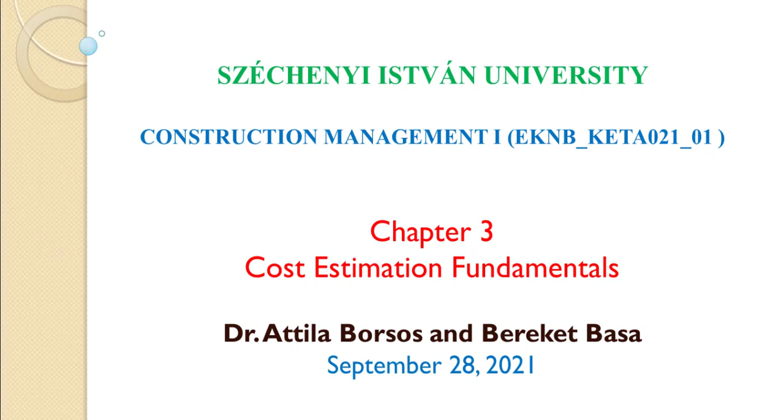Today we are going to see specifically the project cost estimation fundamentals. Last time Professor Attila told you about some estimation fundamentals, and we saw the detailed estimation, especially related with how to calculate unit rate analysis. So there is a lot of information here. Maybe we can divide the class into two because we can't cover all of it. I will try to cover as much as possible, so the rest is homework.

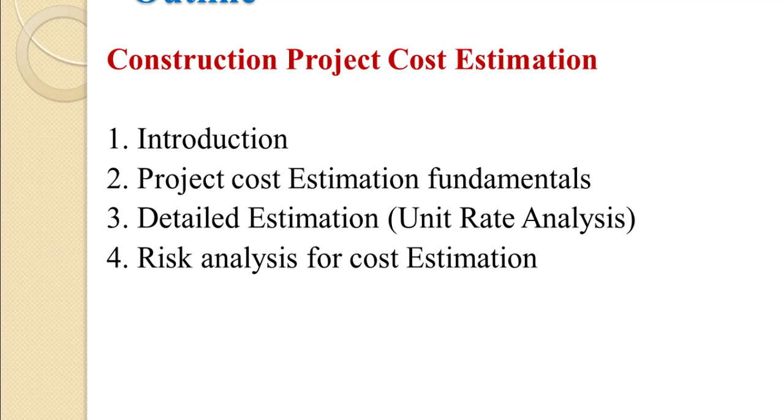As you see here, the first fundamental concept of project cost estimation is that we have three terms: project, cost, and estimation. The project is time bounded, it has its own unique characteristics, a starting time and finishing time. We can say project like road construction, building construction, tunnel construction.

So to start this construction, we need cost, in other words we need money. So we have to estimate, we have to determine the initial or the starting cost, or the total cost of this project. Simply, project cost estimation is the process of valuing the monetary expression. It includes all of the probable costs, for instance during the planning time, during the monitoring time, and during the controlling time for the proposed project. So we are going to estimate or determine the proposed cost for the project.

Under project cost we have different cost types. The first one is the project appraisal cost, because we have to know about the preliminary investigation. During the investigation time there is its own cost, so the first thing is the project appraisal cost, that is the initial cost.

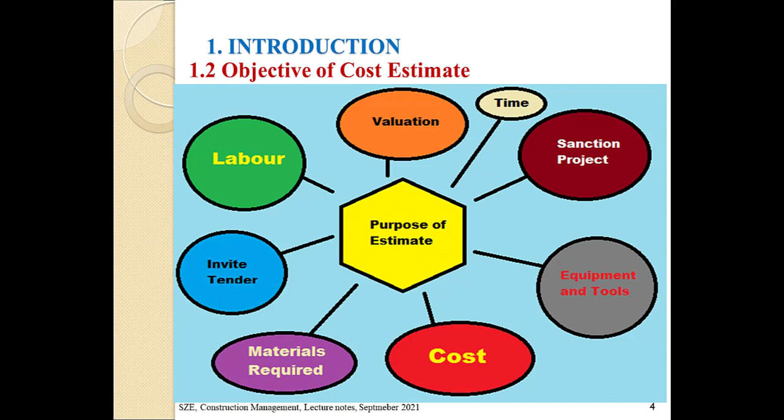Sometimes there is escalation in the work. For example, one of the projects I was involved in had escalation every 6 months, so because of that the price is increasing. So it helps us determine the escalation in the future. These are some of the objectives of cost estimation.

So what is the information required for cost estimation? If you want to be a good cost estimator, the following information is required from you. You have to know about this. The first thing is the correct information of the market price. So you have to know the correct information of what is the price of cement, what is the price of coarse aggregate. If you don't know the correct market price, the total cost estimation will be wrong.

Again, the correct information of the rates of various categories of skilled and unskilled laborers. Also, you have to know the correct information of the equipment. So here when we are talking about skilled and unskilled labor, we have, for example, skilled labor like engineers or professionals. In unskilled laborers, we have daily laborers. So we have to know the correct information, the work rates. We also have to know about the productivity, how much is the output of those workers.

Again, we have to know about the equipment and the tools. For example, if we are going to rent equipment or a tool, we have to know the correct information of these inputs, okay? So these are the most important things.

The final thing is up-to-date knowledge of the construction method. For example, traditionally, if you are going to make concrete, we used the traditional way to mix concrete, but now we are using the mixer or a truck mixer. So you have to have up-to-date knowledge of construction methods. Based on this, we can estimate a project cost perfectly, okay?

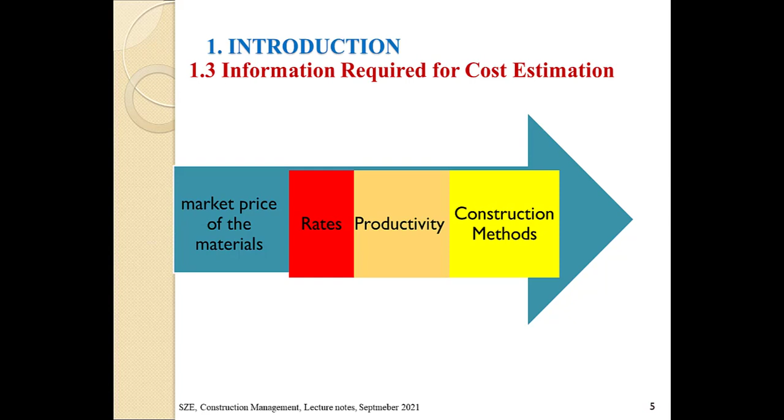So the following are skills and knowledge which are needed for the cost estimator. If you want to be a cost estimator, you have to have this knowledge. The first thing is, as an engineer, you have to be able to read and understand contract documents. Actually, the contract document has two parts, the general part and the specific part. If you don't know about the contract document, you can't estimate. In the contract document we have, for example, drawings. You have to know about drawings also, related with the software, okay?

Again, we have the ability to accurately take off the quantities of construction work, okay? So you have to know how to prepare the takeoff sheets or take off the quantities, which helps us to determine the detailed estimate.

Again, ability to visualize the future building from drawings. One example from my experience: when I was a student and participated in an internship, one of the engineers didn't visualize the future building. The main entrance was supposed to be on the roadside, but he didn't visualize it, so he changed the orientation. So you have to know the future construction project. You have to visualize that. It helps us with the cost estimation.

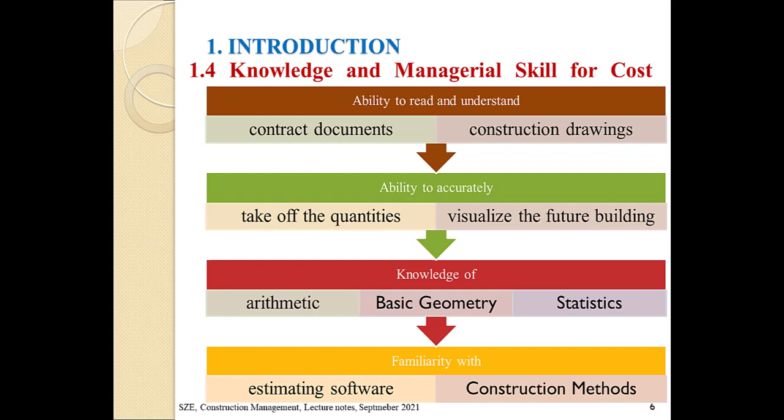So let's see the factors which can affect the cost estimation. Okay? The following are summarized as factors which can affect the cost estimation. The first is the type and documentation of the project. As I told you, projects are different. We can have a hospital, or we can have a road project. So these factors, the type of project and the documentation of the project, affect the cost estimation. So we have to know about our project.

Another one is the scheduling or the timetable of the project. As I told you, a project is time bounded. It has a starting time and finishing time. So we have to know about the scheduling, the bidding environment. I will tell you later, in the bidding environment we have different types of bidding, like open and closed bidding. Sometimes we have negotiation bidding. We can have selective bidding. So you have to know about the bidding environment.

Also, you have to know about the quality and availability of materials. If you know the quality and availability of the materials, it helps you with the cost estimation. Actually it's related with the specification. Again, the construction facilities, the method of construction. Also, the most important thing, another is the location of the site.

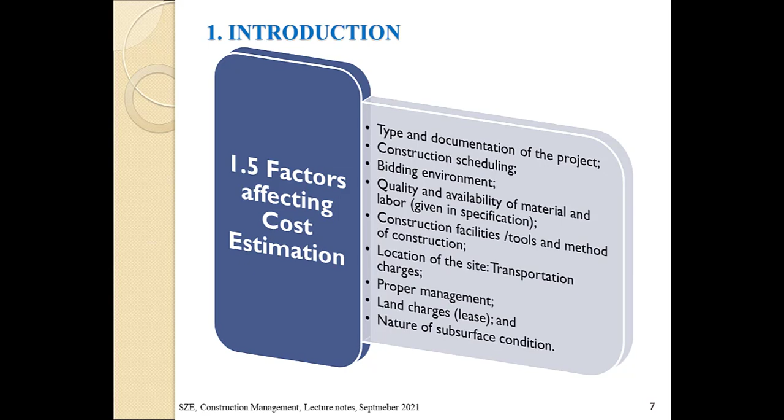So let's see the types of cost estimation. We have two types of cost estimation. The first is conceptual or approximate, and the second one is the detailed one. So we see both of them. Actually, as the name indicates, conceptual is an approximate way based on experience, so we are going to estimate the project cost. When we talk about detailed, it is trying to determine the actual cost of the project. Let's see each one.

For example, the first one is preliminary or approximate conceptual costing. Here, it helps to know the financial position of the client. We have major participants in construction: the client, the contractor, the consultant. The owner is the client. So it helps to know the financial position of the client before starting the detailed cost estimation. Most of the time it is based on practical knowledge.

For example, if you plan to build a dormitory, like K0, K1, K3, based on the previous project we are going to determine the cost estimation conceptually, approximately. Based on the function, for example, if you are going to build a hospital, you have to consider the beds. If you are going to build a cinema, you have to think about how many seats are needed.

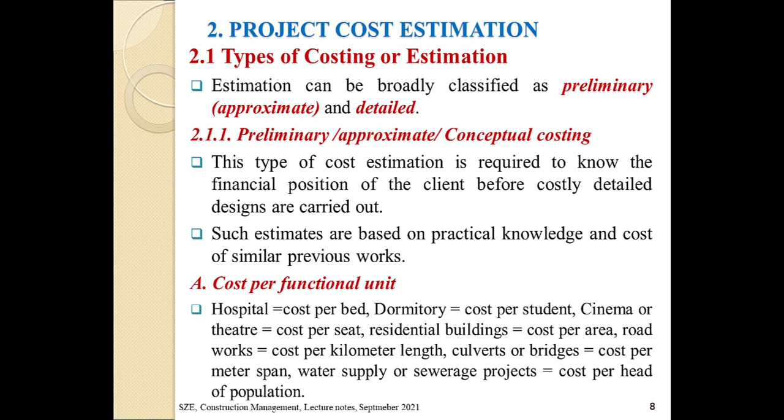Another one is the plinth area method. As the example given for you, like the wall, it is based on the area of the structure. Sometimes this can't cover the roof in building construction, specifically the covering of the roof and some complex parts, but the way you can visualize it, you can make areas. So you can use the plinth area method, okay?

By doing that, for example, if you want to calculate the area of this wall, we have the length, we have the height, so we can determine the area. Based on the area, you can determine the cost. Okay, the cost of this wall can be like this. So based on this, you can construct another wall over there.

Another one is the cubical content method. The difference here is that the plinth area one is cost per meter square; this is cost per meter cube. Simply, we have the plinth area, so if we multiply with one more dimension and with the cubic content rate, that will be the cubical content cost.

For example, in the example the Professor gave you, the wall has its own height and its own length. If you also determine the thickness of the wall, we change from the area to what? Meter cube, yes? So by doing that, we can approximately have the cost of a building. Prof, do you have anything additional?

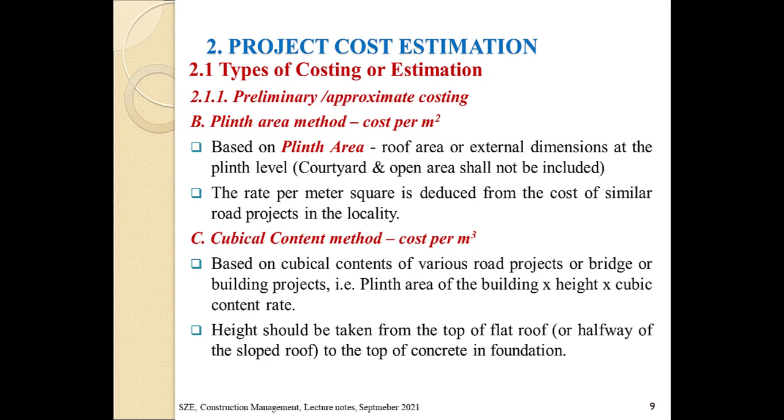Okay. If you're feeling the room is hot, you can open the window if you want. Yeah.

So this is about the conceptual. Let's see about the detailed cost estimate. So this is based on item rates, based on each item. For example, if you are going to have concrete, to make the concrete we have cement, we have water, we have aggregate, we have sand. So based on each item, we are going to make detailed cost estimations. It is most reliable. It's like actual cost estimation.

So for the detailed cost estimation, we need the quantity surveying. So we have to know about the quantity surveying, and the analysis of the different rates for the quantities prepared. When we are saying quantity surveying, we have to survey the quantity of the project. For example, how many meter cube of concrete is needed? What is the bulk excavation? What is the amount of soil which is removed from the road construction? We have to know the quantity of that project, and based on that, the different rates. So based on that, we can determine.

For example, an efficient construction estimate helps us to address properly the required project quality, time, and construction cost. Actually, in construction we have specifically three things. We can express it like this: we have cost, we have time, and quality. These are the most important things. So if we determine the detailed or actual cost of the project, indirectly we are going to address the time, cost, and quality of the project.

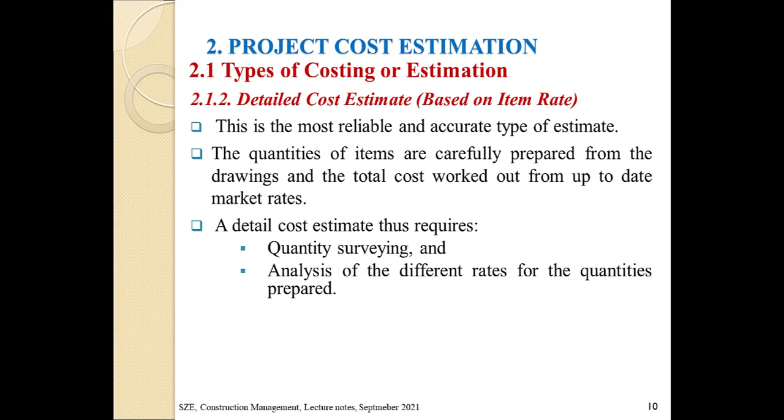So in deciding to participate in the intended project, as a contractor, you have to know about the following things, because they have an impact on the cost of the project, before the estimation. The first thing is the type of the project. As I told you, you have to know about the project. Some of the words are repeated, but most of them are important.

Method of tendering: as I told you, in the bidding concept we have open and closed. For example, with open, if the project is in Győr and it's local, you invite local contractors from Hungary. If it's national, you can invite from Europe. If it's international, you can invite from international places, contractors which are eligible for the project. So we have to know about the method of tendering. Again, the type of construction contract, what type of contract we are going to have.

Again, the number and progress of contracts already at hand, because if you have a lot of projects on your hand, for example 10 projects, and you are going to take another new project, it's difficult to handle, because you have to mobilize all your equipment from one place to another. Maybe you have to rent equipment or other things. So you have to know the number and progress of contracts on your hand if you decide to participate in the bidding process or a new project.

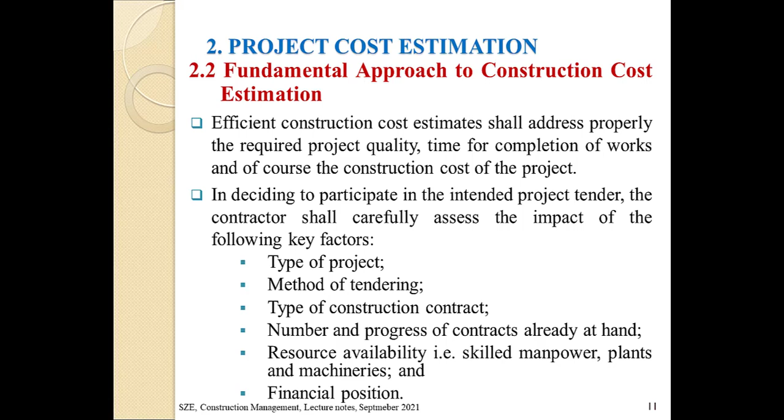Yeah, thank you. The first is you are showing your intention to participate in the project. After that, if you decided to participate, as a contractor, I'm taking you as a contractor as an example, to participate in the intended tender or the bidding process, the following has to be given attention. I mean, you have to know about the following things, about the general and the particular condition of a contract.

In a contract, we have a general part and a specific part. We have to know what is the general part of the contract, and the specific or particular condition of contract. If you know the condition of contract, it will be easy to participate and to estimate the cost of the project. Again, the technical specification. What are the technical specifications? What are the technical requirements?

You have to know as an engineer also the drawings. What type of drawings are available? And you have to interpret drawings. There is one saying: as engineers, if my language is different from your language, we can communicate with drawings. So as a civil engineer, you have to interpret and read drawings. This is the most important thing. Another one is the estimated bill of quantities. This is the most important thing.

Also, the method of measurement, how we are going to measure, the methodology to measure the project, how to estimate the total cost. So we have to know about the methodology of measurement. Again, supporting documents. The condition of contract, technical specification, drawings, these are all documents. So in addition to these, we have to have support documents. I will explain everything in detail.

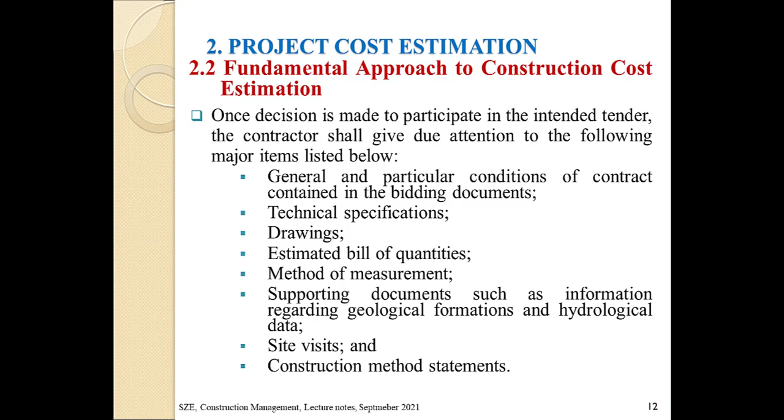Again, the site visit and construction method statements. Let's see each of the above in detail. The first one is general and particular condition of contract. The general condition is the general part of a contract. Especially the particular condition of contract, we have to know about this. This is the most important thing for civil engineers. The particular or specific condition of contract can include, for example, the amount and type of performance security, the security you give as a guarantee for the owner or for the public.

Again, the amount of advance payment. Do you know advance payment? Anyone? Advance payment means, for example, Yusuf is going to participate in a construction for owner A, but Yusuf doesn't have money to start or to mobilize his equipment, so he needs some amount of money from the owner in advance. You understand? So to have advance payment, you have to present the advance repayment guarantee, because the owner is going to give you the money. This advance repayment guarantee you have to include in the particular condition of contract.

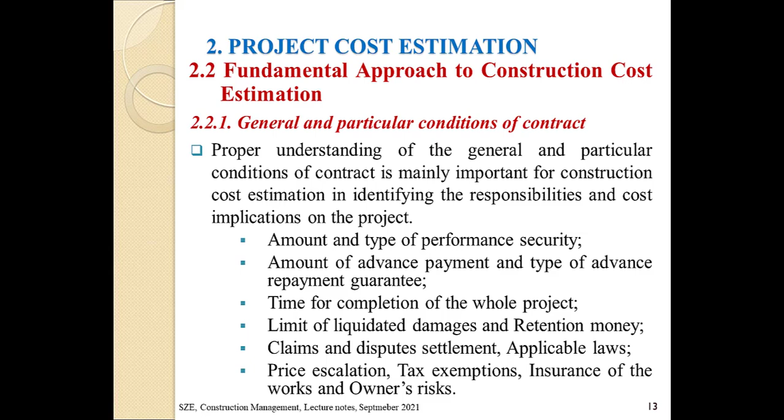Another one is technical specification. Under technical specification, the following crucial information should be provided to the contractor to determine the construction cost of the project: the quality of materials and what type of material with what quality, the quality of machineries and plants - this should be specified in the technical specification - and the quality of workmanship, erection and installation method.

For example, if you are going to build a huge hydroelectric power project, we have to know how to erect and install the plants, how to make the offices over there, whatever the case. So based on the technical specification, we can address these things.

Again, the test and inspection requirements. For example, for road construction, we have its own test types - you took the course related to highways, right? So there are tests for the highway, like for asphalt construction. Also, when you are going to build a project like a bridge or building, we have tests for the concrete. So you have to specify the tests and how the inspection requirements are to be done.

You have to put in the technical specification, also the methodologies. Do you have any questions? No, okay.

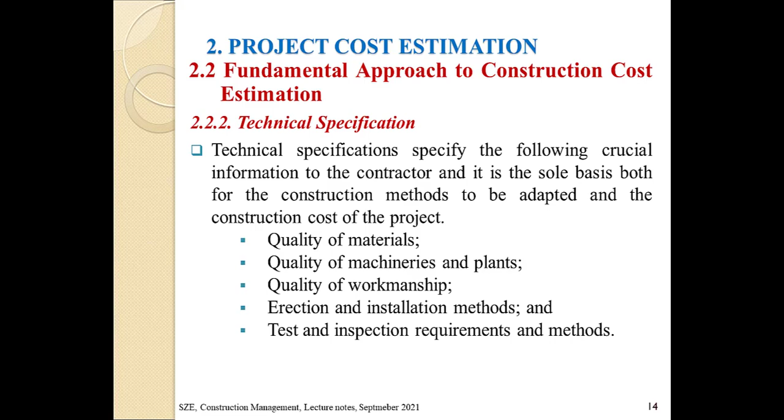Again, these are also part of the technical specification - the accuracy of the technical adequacy, defined and clear stipulation. This also should be included in the technical specification, along with fair and equitable requirements, formats which can be easily used during bidding and construction, and legal enforcement.

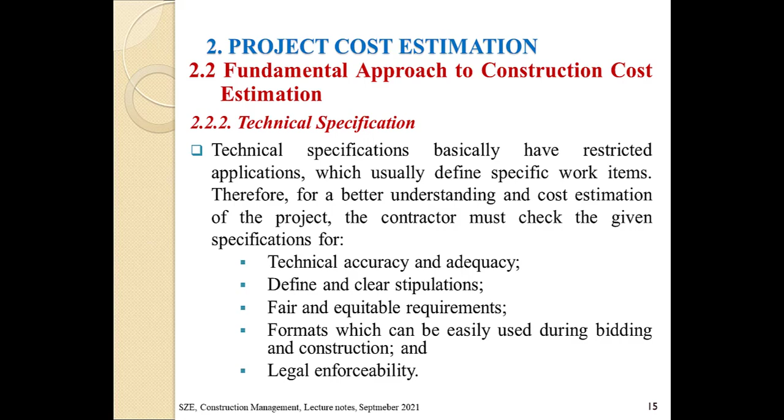I have to try to be fast. Another important thing in project cost estimation is that you have to know about the drawings - this is the most important thing.

As I told you, if we don't have a common language - for example, if I don't speak Hungarian, the person who speaks Hungarian - we can still communicate by seeing the drawings. You know what I'm saying? So you have to know about the drawings of the project.

Here, for cost estimation, for example, for road projects, we have to know about asphalt production, transportation and placement, and transportation of materials to different floors or sites - which parts you are going to transport. You have to know about this, and you can get this information from the drawing easily, you know what I'm saying?

Again, methods and types of scaffolding - for buildings or asphalt construction, we can build the bridge and the shuttering works. Erection is the same as in the technical specification - erection and installation of glazing works, temporary access for manpower working at different floors, and skilled manpower. So we have to clearly understand the drawing.

So based on the drawing, we can easily understand what is written here. So drawing is one of the most important things for the project cost estimator.

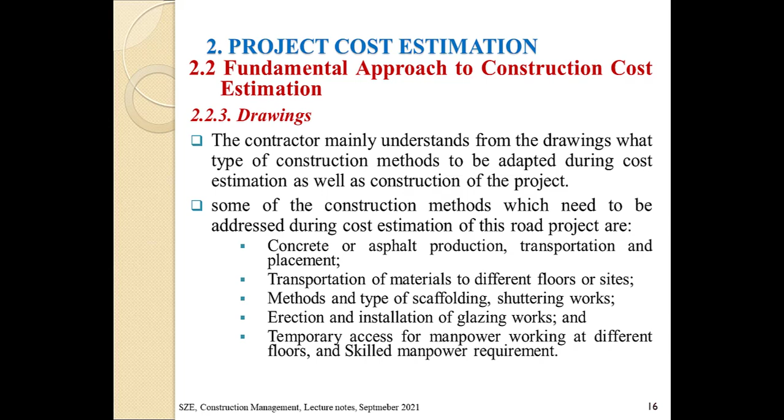Just one thing I would like to highlight here is that so far what we have discussed, you're going to need a unit price and you will need a quantity. The quantity comes from the drawings, that's how you do your quantity calculations. That's why the drawings should be accurate, and you should be able to understand those. So drawing is the most important thing, probably you have explained that, and I just wanted to highlight it.

Another one is estimated bill of quantities. So here the estimated quantity of work, the volume of the work, should be known. It's also the basis to determine the type and number of resources to be deployed in the construction project. For example, for concrete, how many meter cubes? If you know the estimated volume of concrete, say 10 meter cube, it's easy to determine the amount of cement, aggregate, water, and admixtures if you're going to use them.

So the estimated bill of quantities can be the basis to determine the type and number of resources which are going to be deployed during construction of the project. Again, the given quantity of work can be executed during completion of the work, so it also helps us with the construction method. Based on the estimated bill of quantity, we can determine the construction method which can be selected during our project time.

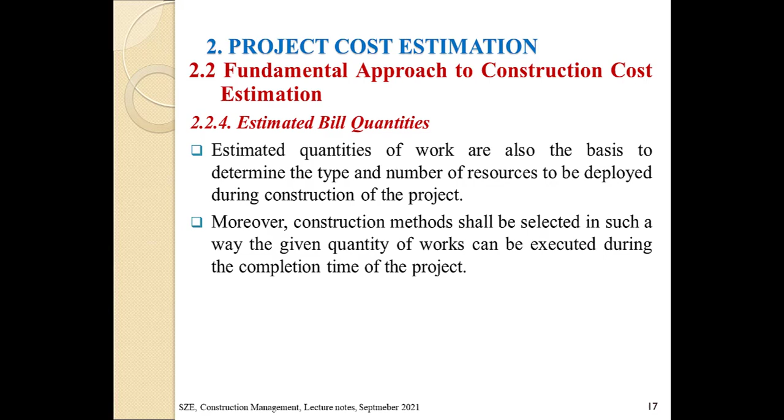Another one is the type and size of the crushing plant. Based on the estimated quantity of work, we can determine the type and size of the crushing plant, the type and size of mechanical mixers or batching plants, the type, size, and number of machineries, like how many dozers you're going to use. For example, for 10 meter cube concrete, we can use different types of equipment, like mixers, whatever. So you can determine from the estimated bill of quantities the type, size, and number of machineries, the type of skilled and unskilled manpower, and the type and quantity of construction material. This is also important in project cost estimation.

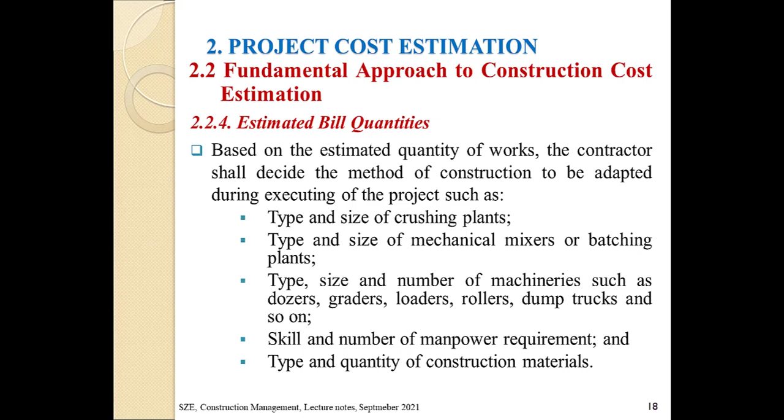Another one is supporting documents. Like the first thing, as I mentioned in the previous slides, the condition of contract is the most important thing. In addition to this, we have to have supporting documents. For example, if you are going to construct a building or road in seismic areas, you have to know about the geological formation of that area. That is a supporting document for your project.

Again, hydrological data, when will be the rain, when will be the sun. Based on that, you can determine not only from above, the ground surface, but also under the ground surface, you can easily estimate the projects. So the contractor shall have the ability and experience in interpreting the technical data provided to determine construction methods to be adapted, which directly affects the construction cost estimates. Based on this, the contractor can technically be able and experienced in interpreting the documents, so as to determine the project cost.

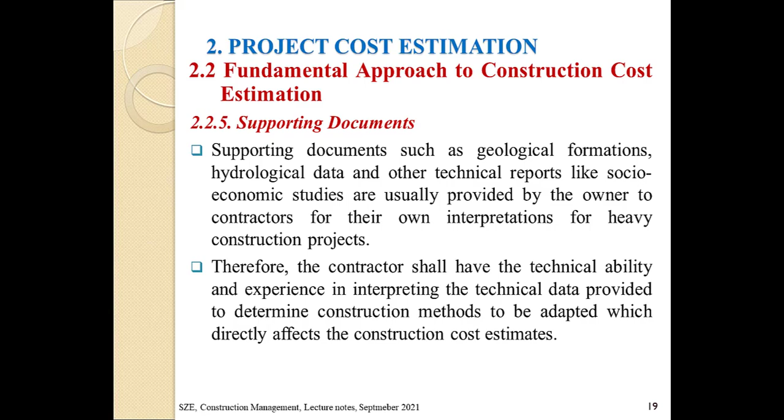Another important one is site visits. As an example, one of the projects I was involved in as a student during internship, the contractor didn't go to see the place for 20 kilometers. The soil needed stabilization, you know stabilization? The soil is like clay, so they have to stabilize the soil, but they didn't visit it. If you visit the site, it gives you some insight about the project cost. It helps us prepare competent and reasonable construction cost estimates. So the contractor must visit the project sites.

Already, before the tendering phase. Yeah, the tendering phase. So even if it's a greenfield investment and there is nothing on the site, the example that you told is a good one.

So, like for instance, soil characteristics. Even if you just go to the site and see the terrain and the soil characteristics, you can consider that in your cost estimation. That's worth doing before you apply or send in your bidding documents.

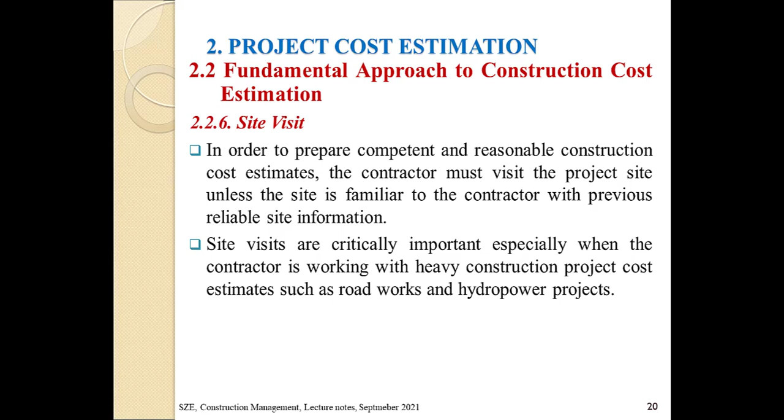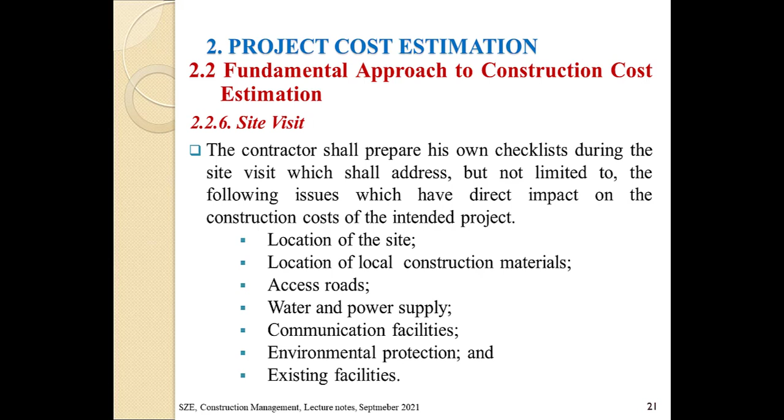Also, by visiting sites you can determine the location of sites, the access road. If there is no access road, you are going to estimate the additional cost for the access road, water, power supply, communication facilities. These all can be done by visual inspection before the tendering process, before the bidding process. So a contractor should visit the site.

Another most important thing is method of measurement. So the contractors already understand the method of measurement incorporated with the bidding documents. The bidding documents include the above things: the condition of contract, drawings, technical specification, everything. So for example, method of measurement, how we are going to measure the project.

We have technical specifications like BS code. Most of the time you use BS code for building constructions. Again, in Ethiopia, in our case, we use the Ethiopian code standard. So for the road, we use the ERA standard specification. Based on that, we can measure our projects and easily determine the cost of the project.

Also, civil engineering standard method of measurement, or you have your own country's specification. Based on that, you can determine the bidding document, like determine the costs, before the breakdown calculation, before making the breakdown of the project.

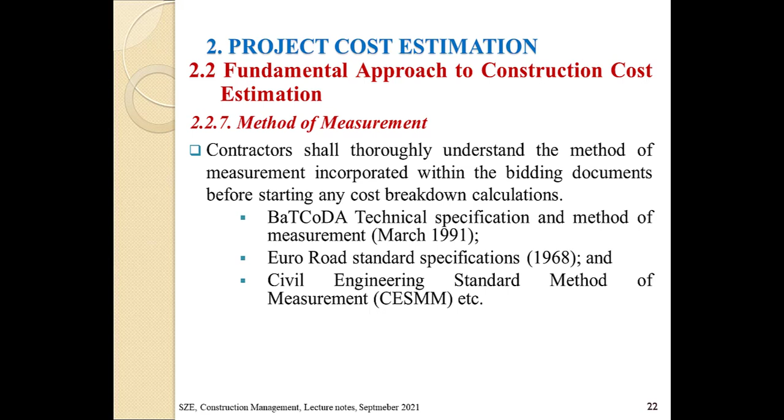This also gives the construction method statement, the final thing. It gives the clear picture of each project activity during the construction phase of the project. Here you can determine the work as specification, the estimated quantity of works, safety standards, as well as completion time. These are the sole basis in determining the construction method statement of the project. By doing this, we can approach the cost of the project.

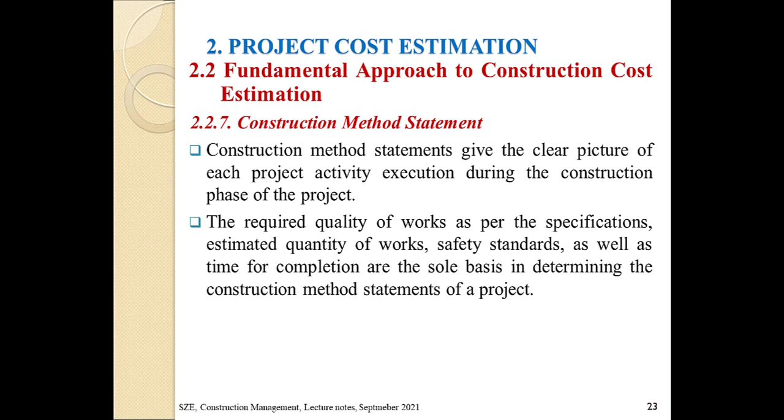So in the construction method statement, the following are the critical or crucial construction issues that should be indicated: the first is the skill and the number of manpower required. Sometimes we may need more professionals, so we have to know about that.

The type and specification of equipment: as in the previous technical specification, the type and size of machineries, the number—it is related, but we have to mention it in the construction method statement separately, like this. Again, the quantity and quality of the materials required, proposed working crews—for the crews we have to determine the material, labor, and equipment.

Also estimated crew productivity, estimated duration for completing the project, expected defects, and the remedial measures. We have to know about expected defects. Sometimes when constructing a road, there can be a defect in the project, so you have to expect that this kind of defect can happen. Based on that, you can easily avoid problems related to construction project costs.

Let's see the basic components of construction projects. This is the most important thing. After this, after 10 minutes, we can take a break.

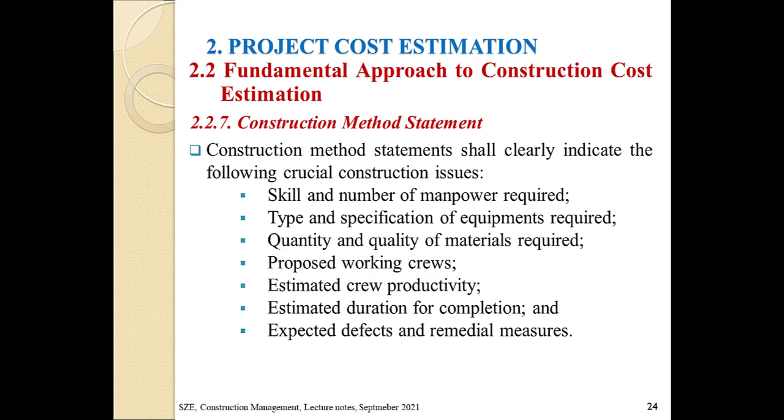So this is the most important thing before making the need analysis. This is the most important component of a construction project in cost estimation. First, we have two types of costs. Basically, we have direct costs, as the Professor mentioned to you last time. Also, we have indirect costs.

When we say direct costs, these are costs directly incurred in the project on the site, related to the material, the labor, and the equipment. So we call it direct costs. Also we have indirect costs. These are overhead costs: we have head office overhead costs, and we also have site overhead costs. These are costs not directly related to the labor, equipment and machinery.

So direct construction costs are those that can be specifically booked to an activity in a project. We are going to book, for example, the cement or the aggregate for the road construction. We are going to book the price of that thing. That is directly related to the project, so we can say it's a direct cost.

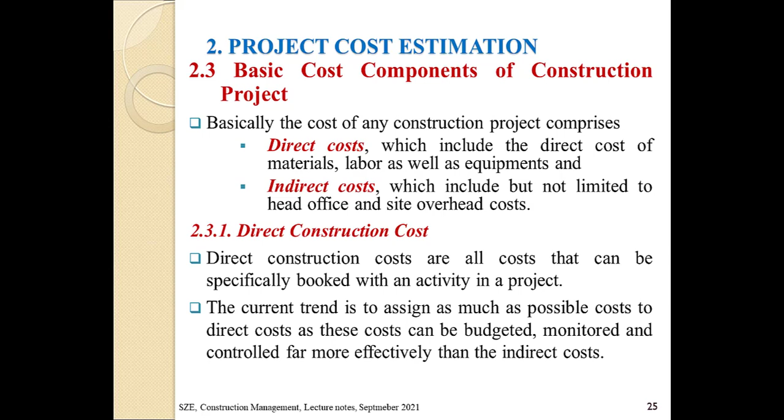Currently, it's actually very difficult to determine the overhead cost. So as much as possible in your future career, it's important to have more direct costs, because head office costs are sometimes difficult, while with direct costs it's easy to know the total project costs. So allocate as much as possible to direct costs, as they can be budgeted, monitored, and controlled easily. So we advise you, if you will be a contractor in the future, to have more direct costs. I think it's clear what I'm saying?

Okay, so under direct costs we have direct material costs. These refer to the cost of materials. We have different types of materials in construction projects, like asphalt, bitumen, aggregates, soil. Also we have costs related to labor, which can be skilled and unskilled. Here we look at the workers working on a specific activity, such as carpenters, masons, erectors, whatever. So we are going to determine the direct labor cost.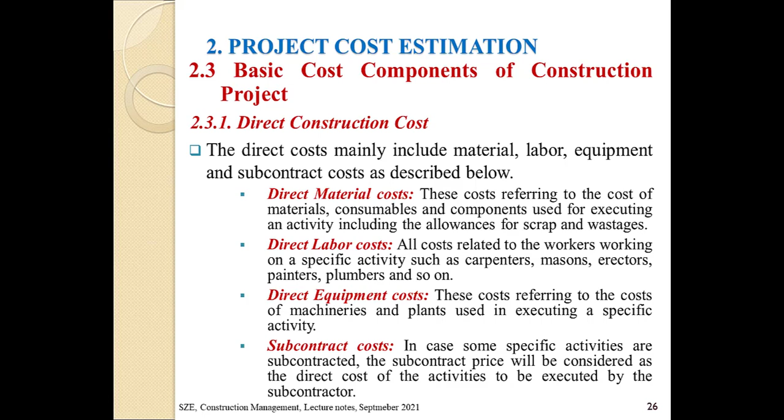Again, we have to know the direct equipment costs. If you have equipment, that's okay. If you don't, you are going to rent equipment from other places, so you have to know the equipment costs. In addition, we have to know about subcontract costs. If the project is very huge, or it needs a specialty, you are going to give some part of the project to another contractor or firm. So don't be confused: subcontract cost is under direct construction cost. These are the direct costs, which can be booked specifically during implementation of the project.

The indirect costs are a broad concept. These are overhead costs, which mainly include head office and site overhead costs. Don't be confused about site overhead costs; I will explain this. Head office costs are the costs related to the head office. For example, the project is in Győr, but your head office is in Budapest, so there is a cost in the head office, related to administration, managerial payment, benefits, paying the rent of the office, different types. I will explain everything. So these are overhead costs.

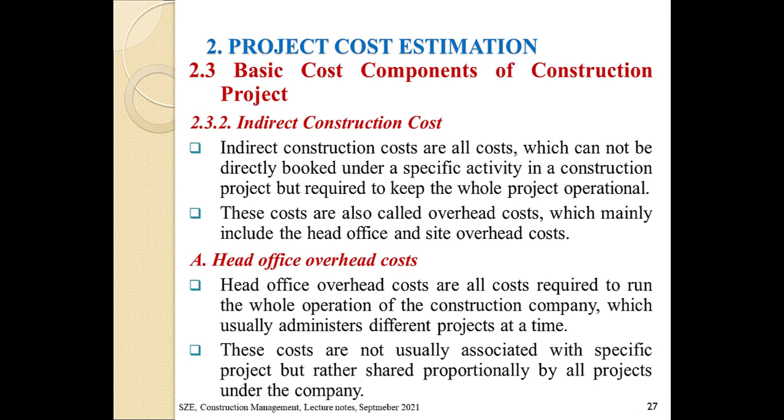These are not directly related specifically to the project on the site, because if your company is A, you can have 10 projects, and you are going to manage 10 projects at the same time from the head office. If something is implemented only in project A, directly on the site, that is a direct cost.

These are some head office costs: senior management costs, related to the salaries and benefits of the top managers. Also indirect labor costs, like costs related to the financiers, anyone working in the garage, office engineers, administrators in the head office. It's indirect labor cost, not direct labor cost. In the previous slide, I explained direct labor cost. Here it's indirect, meaning at the head office level.

Again, head office building cost. If you rent a building that is not yours, you are going to pay for the building. That is an indirect cost, an overhead cost.

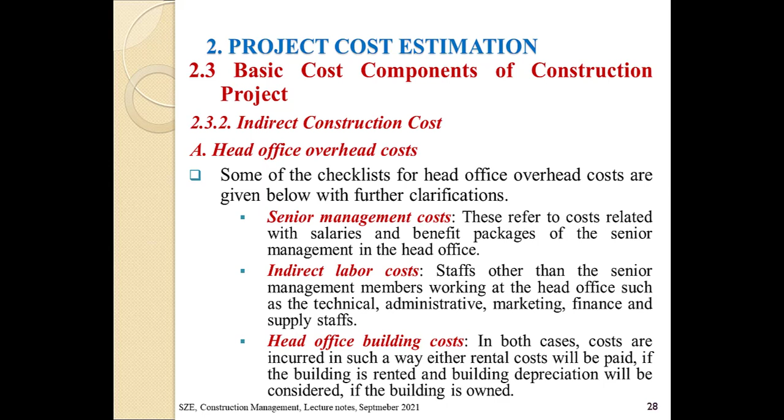Again, bidding expenses. For example, if you are going to participate in the bidding process, you are going to buy the document from the owner. This is an expense related with the bidding. Also related are bid bonds and site visit expenses. These are included in the bidding expenses.

Again, expertise service costs. Sometimes you need expertise, like professionals, especially if there are disputes and claims in your project. You have to hire professionals related with the disputes. You have to hire lawyers, auditors, or sometimes, for example, in road construction,

we can take our professor Attila. He is a professional in road and transport safety. So specifically, if we need something related with safety, we can take him. That we call expertise, a specific person who is able to do that work. So we can include this expertise service cost in the head office overhead cost.

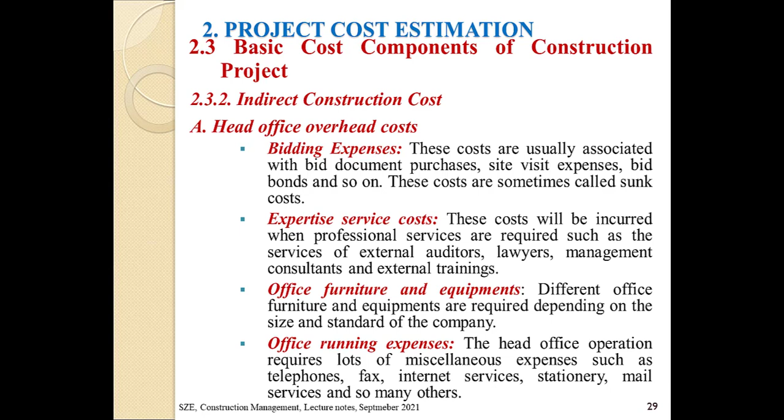Also, office furniture and equipments, office running expenses, like we have to pay for the telephone, fax, internet service. These are all office running expenses. Again, if we have workshops for the machineries, garages, warehouses, these are all related with the head office overhead cost. Don't forget, when we say head office overhead cost, it is the cost which is at the head office, not directly related with the sites.

Okay. Again, we have bank charges. Maybe we borrow money from the bank, so we are going to pay it back with interest. If you are paying back to the bank, that's the bank charges. It's also head office overhead cost, as are insurance charges, transportation and travel expenses.

Sometimes the company can't provide you a company car, so you are going to use rental cars, or you can use transportation, so you have to reimburse that transportation cost. So this is also head office overhead cost.

Sundry expenses, these are miscellaneous expenses, like we can use them for advertisement of our project, or for donation. So we have to know about these things. Sundry? I've never heard that term. Sundry, yeah. Sundry, I've never heard.

Yeah, in the project, for example, we are going to announce, advertise our company. We call it sundry. It's miscellaneous costs, another word for miscellaneous. So for donations, if you are participating in a donation, in a party or something, it's an expense. So we have to consider it under the head office overhead cost.

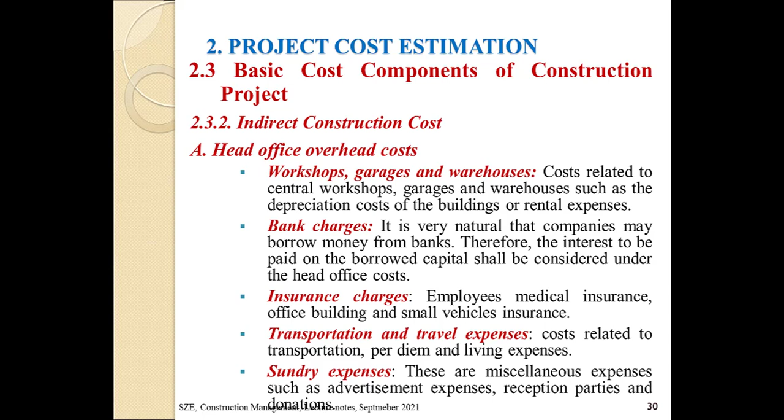Another thing, as we mentioned, under indirect construction costs, we have site overhead costs. This is the final part for today. It's the same as head office overhead costs, but here we have the site. On the site, we are going to have site overhead costs. In the same way as in the head office we have managerial costs, here we have site managerial costs. Again, here we have indirect labor costs, in the same way as in the overhead costs.

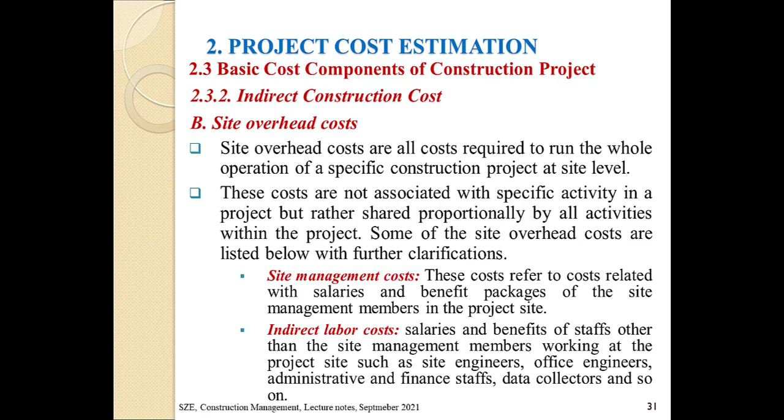For example, our head office is in Hungary, in Budapest, and our project is in Győr. If it's very far, like 1.5 hours, we have to have another office on the site. So we have to know about the cost of that site's expenses. For example, there are managerial staff on the site. You have to give salary and benefits for them. Indirect labor costs: you have office engineers, site engineers. These are indirect labor costs related with the site.

So again, mobilization and demobilization costs. When we say mobilization, we have to mobilize all our equipment to start the project, and after finishing the project, we are going to take all our equipment and all our things from the site. So that's demobilization. We can say they are like transportation costs.

Another one is tender expenses, related with the performance security. Like I mentioned, the bank guarantee in the conditions of contract, we can have this also in the site overhead cost. For example, we can build a small office on the site. That's what we call site overhead cost, related with that mainly. Okay, not with the material, not with the equipment, not with the labor. Again, expertise: we can also need expertise service costs.

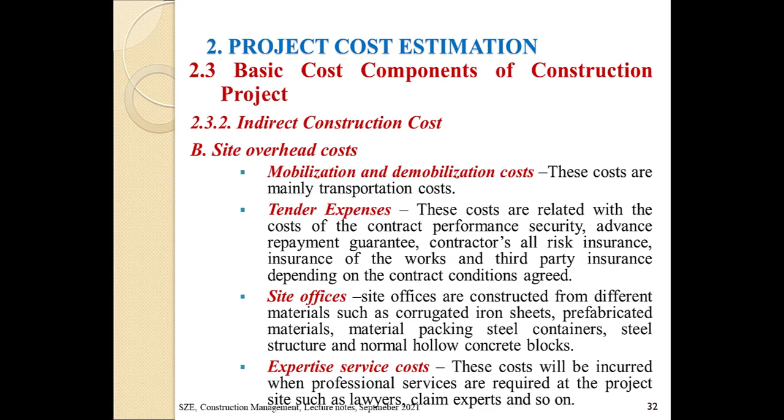These are also site overhead costs. We can have furniture and equipments, office running expenses, radio communication. So these are also site overhead costs.

Two more slides. If you just say a few words about risk allowance and then the profit and income tax, that's fine.

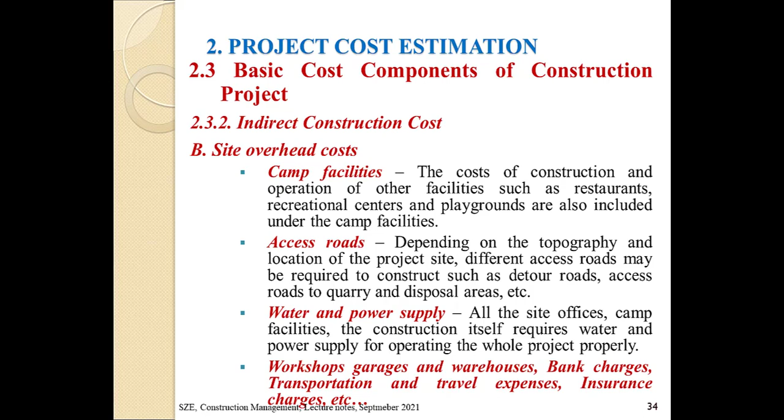So these are the site overhead costs. Then in the project cost estimation, we have to know about the risk allowance because there are risks in construction. It's difficult to avoid risks, but we can minimize risks in the project. So we have to know about the risk allowance. We will see all of this in the calculation next time.

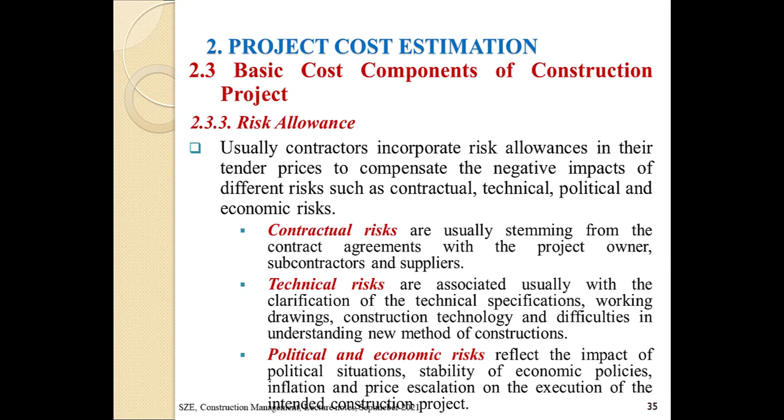The final topic for today, I hope, is the profit and income tax. This is the most important thing because the aim of the contractor is to build a project and then to have a profit. So we have to know about the profit and income tax. The tax is a very important thing also for the government or for the public.

When the contractor executes the project, they invest their capital to get the maximum possible profit from the construction project. So we have to know about the profit margin. It entirely depends on the market competitiveness and the company strategy. You have to specify the profit margin of your projects. Sometimes it can be 30%, sometimes 20%. If you know the profit, it helps you to estimate the project.

These are some examples from the Ethiopian tax proclamation: any construction company tends to have profits of about 30% of gross profit. So they want to have 30%. It's too much, yes, but that's the maximum amount.